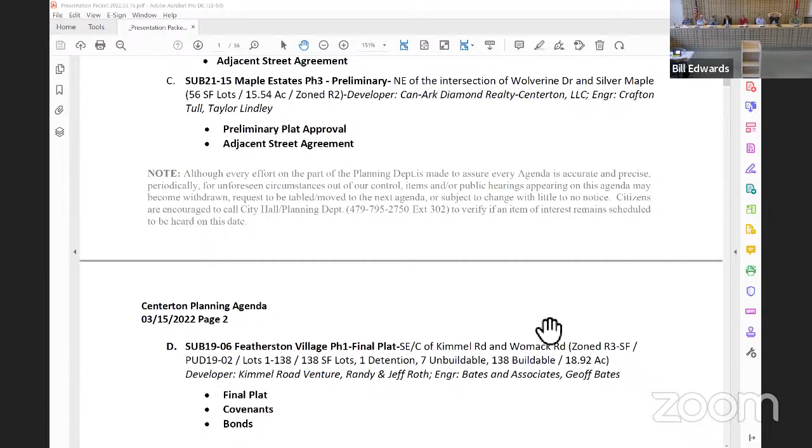Yeah, so the work they're doing on the food truck over here, still the work, that's Saturday. And the harps, take a peek at them, man. All kinds of stuff, they're working hard.

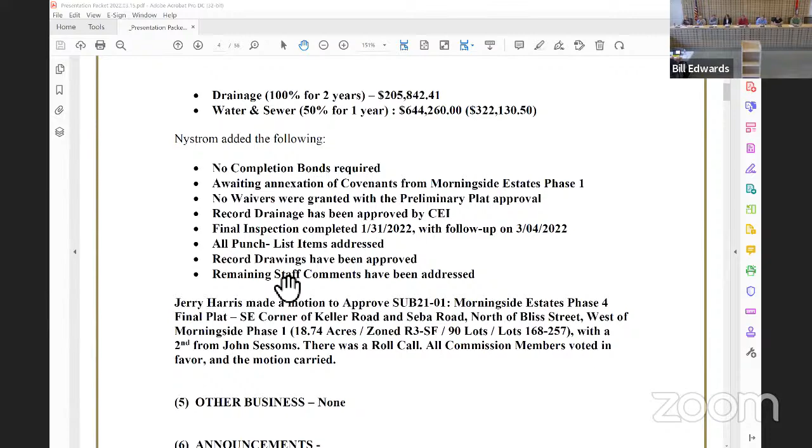All right, next on the agenda this evening is the ratification of the admin approvals. I looked through them, I didn't have any questions. Are there any questions or comments from any of the commissioners?

If there are not, then I would entertain a motion to approve the ratification for the admin approvals. Tony: I approve the ratification of the administrative approvals. Second. Motion and a second. Is anyone opposed?

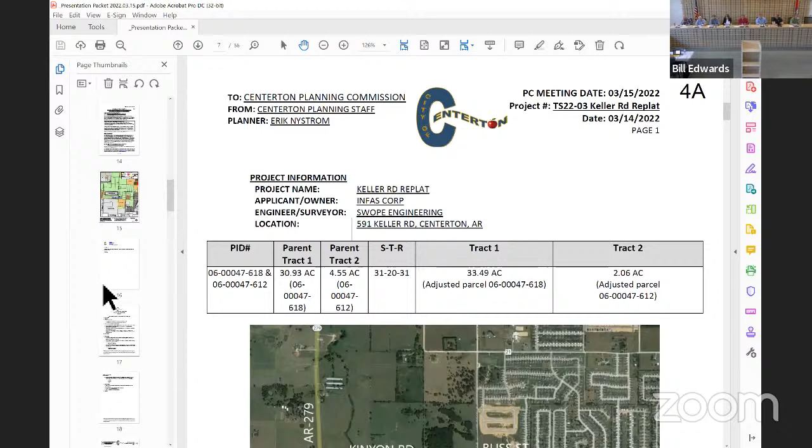All right, next on the agenda this evening is new business. First thing under new business was withdrawn, which was rezone 2203. Second thing on the agenda is development 2114, the Casa Castillo large scale development at 148 Seba. As a reminder, it's 19.5 acres and it's zoned C3.

To give us an overview, if you have any engineering questions or site questions, I'm here with the engineering survey. Yeah, in person, I'm Jeff. Yeah, I've talked to you a bajillion times. Yeah, the overview is pretty simple.

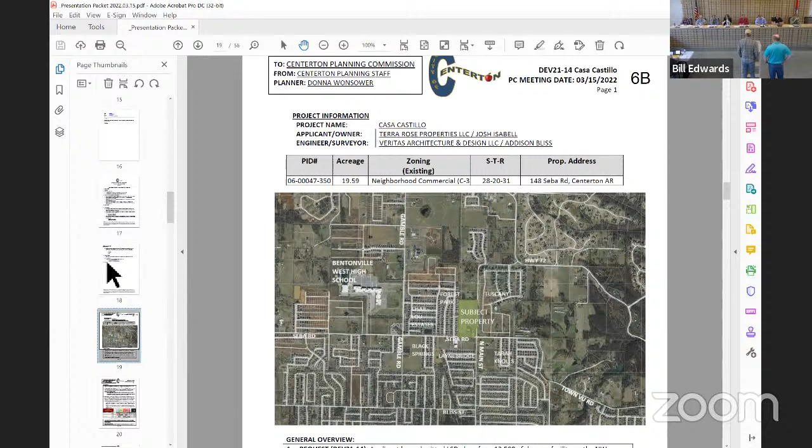Give us your name, please. Addison Bliss, the architect for this. The overview is pretty simple, it's a lot on an approved PUD. We're looking to do a daycare facility, in addition to the couple of adjacent roads and necessary structures, including parking, to service that first phase.

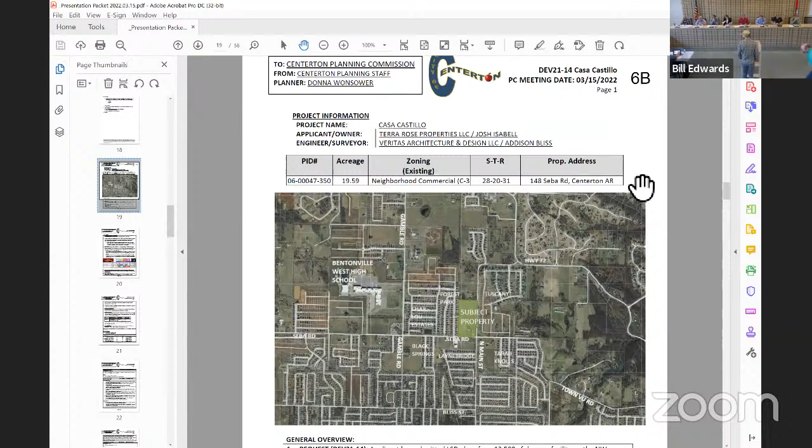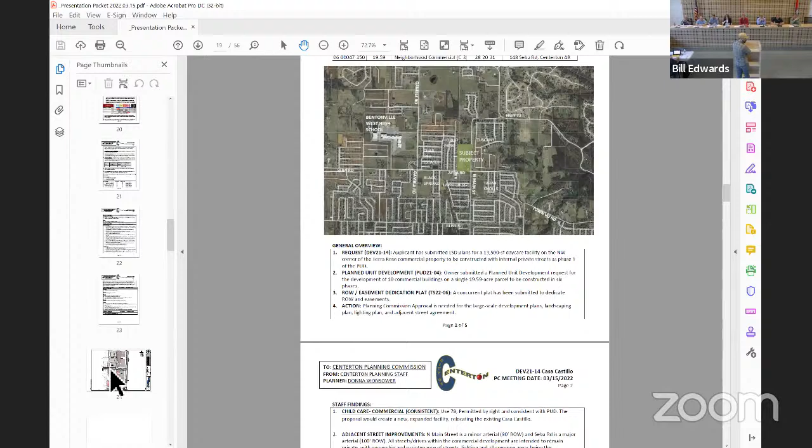Donna, you want to give us a staff overview? So this is phase one of the PUD that you all looked at previously. It is for a 13,500 square foot daycare in the northwest portion of the property, as well as the roads, utilities, and other infrastructure needed for the property.

We have received a concurrent right-of-way and easement dedication, which we are currently reviewing.

With that, there were trails which were discussed as part of the PUD. Staff has looked at having those installed with the buildings close to the road in order to avoid potentially those being damaged with later construction.

We have received a traffic study by Peters and Associates looking at the impact on the road, looking at the capacity and the levels of service. Levels of service are rated on an ABC scale. Anything lower than D would be unstable flow. D is approaching unstable flow.

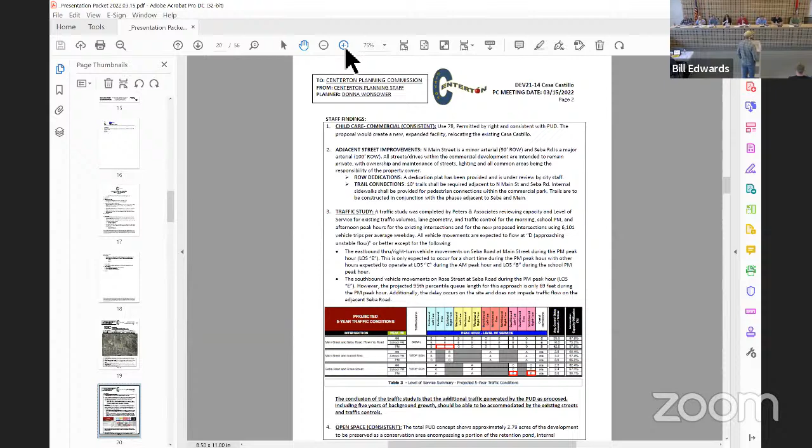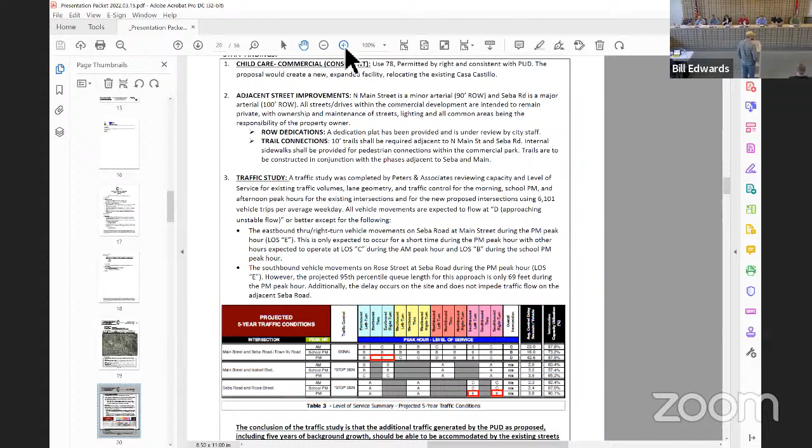Everything in the scale, which in your report, was D or better, except for 2, which is the eastbound through/right-turn lane on Seba at Main Street during the evening rush hour, and southbound also. The general conclusion of the report was that the existing roads can support the anticipated 5-year traffic from both the surroundings and from this development.

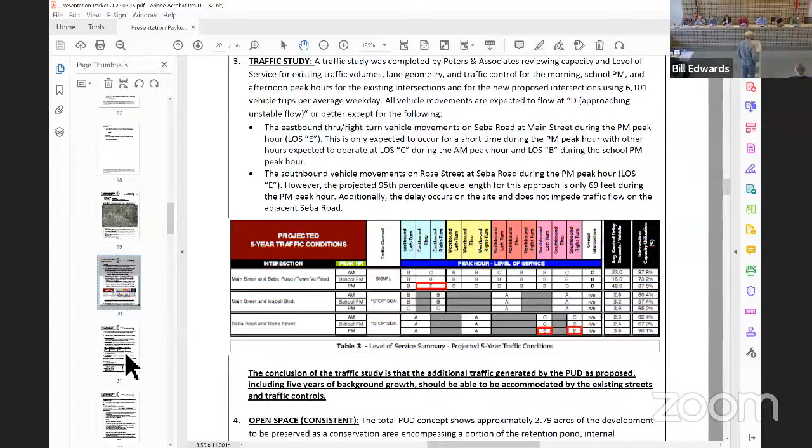There are some open space requirements from the PUD. There will be some requirements from this, which would be dealt with through dedication plat. There has been landscaping provided with this, with some trees along the western part, as well as some trees with parking areas.

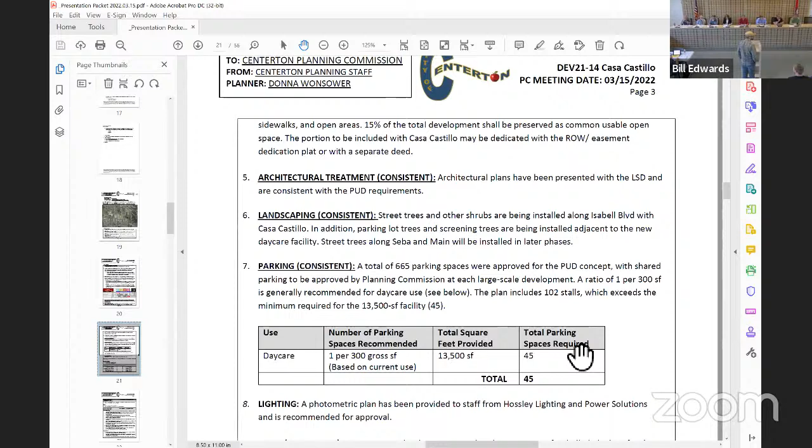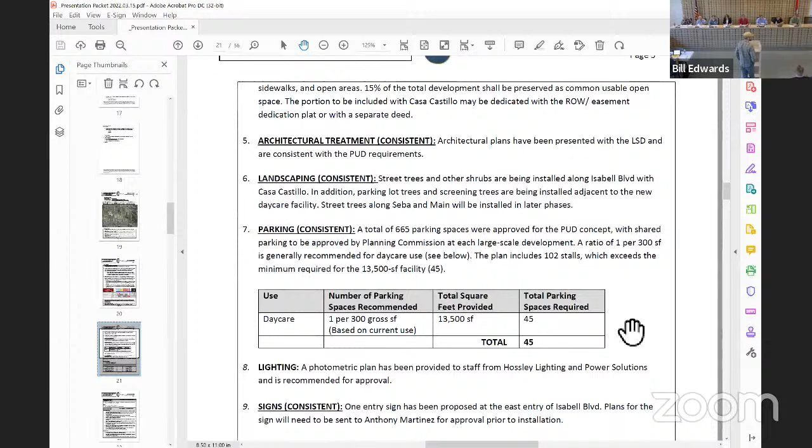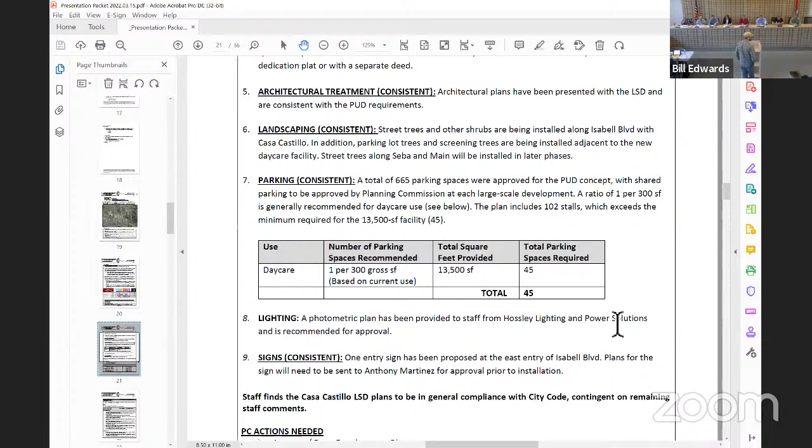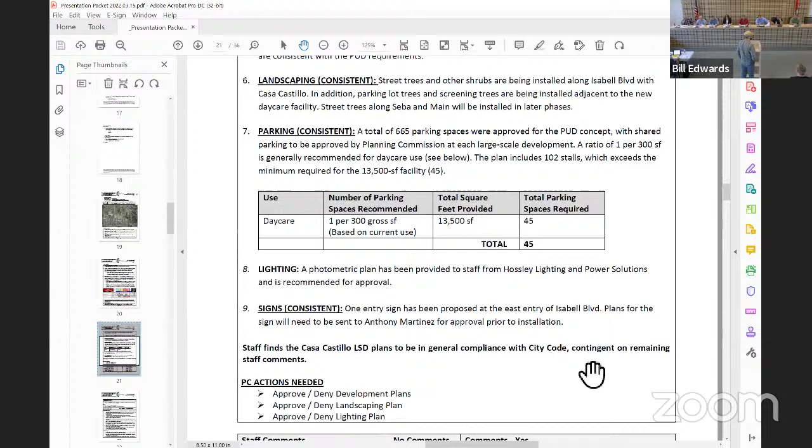So we did receive a plan for approval. There is one entry sign provided at Isabell. What we need planning commission approval for is the landscaping plan and the light. There are a couple of outstanding comments, including a minor adjustment to the adjacent street agreement, but generally everything is very minor, and we recommend approval.

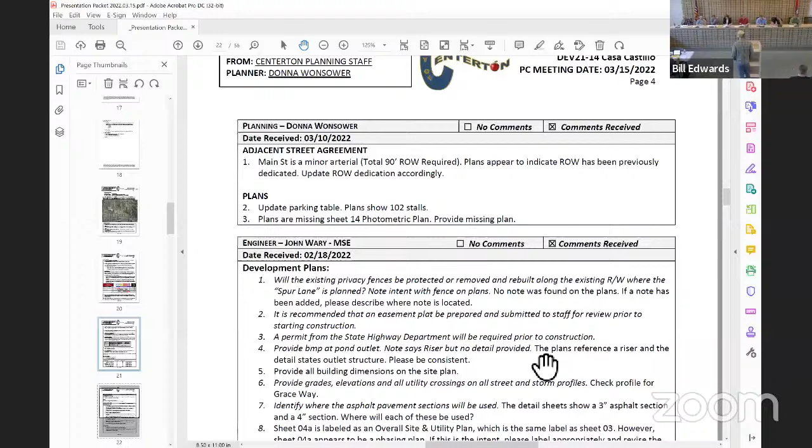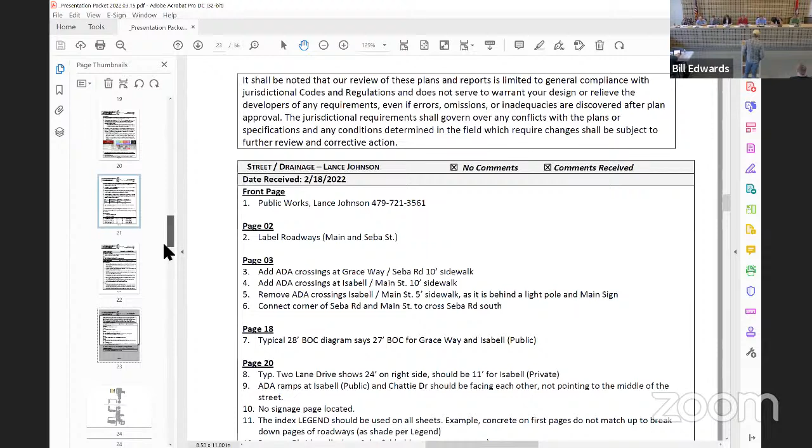And get the adjustments with the right of way and easements taken care of on that plat. Any questions or comments from any of the commissioners?

So we saw the overall PUD last time. Are there any changes to the site plan specifically for this one that would impact the PUD? Does it line up pretty well? In general, it lines up pretty well. There were some minor adjustments with how the landscaping and the trees function a little bit more, but overall it lines up pretty well with what you all saw.

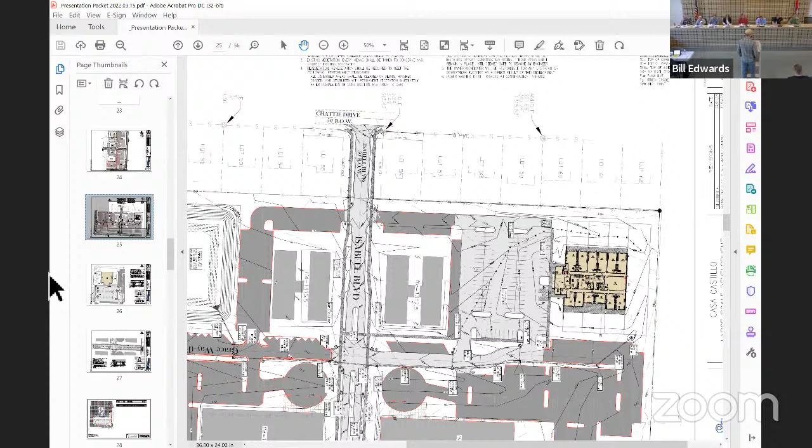Any changes to the Isabell Blvd? I know there was some talk last time about traffic going in and out of the neighborhood, doing something to slow that, I think we did the median, right? It is still aligning with the existing spur. Yeah, I see it, I see it. North is currently right on this plan, yes. That's great. If I turn it, my computer will completely freeze.

As I recall from the last meeting, we talked about traffic calming and a general consensus. I think it was that the speed bump situation we were talking about was not desirable, and that what we did with the trees, the landscaping, and the median was a pretty sufficient traffic calming strategy. I didn't see the bottleneck there. That kind of helps a lot too.

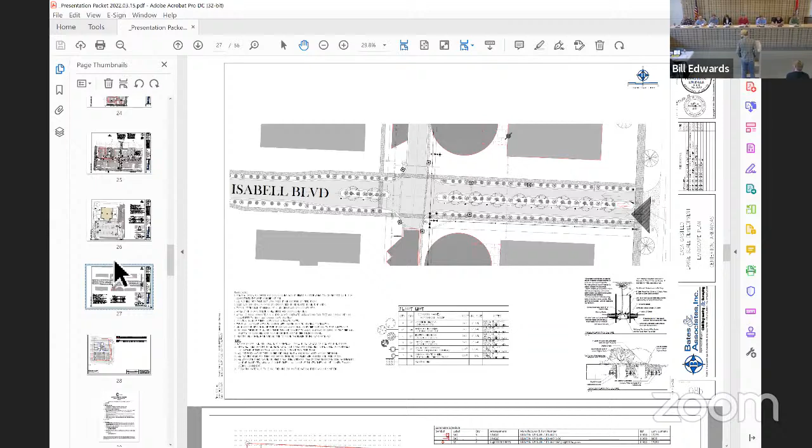Jeff, I have a question on the development plan. On the comments, they listed on item 7, the details show a 3-inch asphalt section, a 4-inch asphalt section. Does the section for Isabell meet that? I'm not seeing, I missed it. I'm not seeing the street. There should be some details, it's okay with the detail of the street.

Details with the street sections on there. I think what you're looking at is just for the parking lot. It could actually be some cross section. It may not have made it into our package yet. We didn't get that.

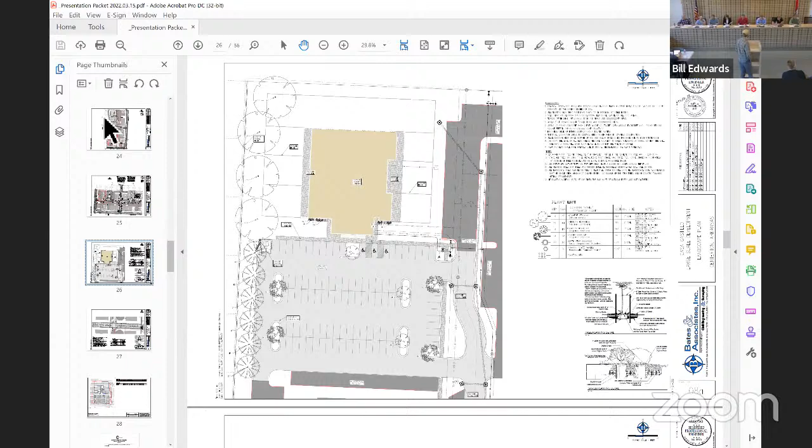Is staff okay with the level E? I don't, it references Rose Street, but I assume it's the Grace Way. The traffic study references Rose. Cedar Road and Rose Street. But Grace Way is, so I imagine.

Did that road name change? The South Street should have changed to Grace. Grace? That's not referenced in the traffic study. It says Rose Street. Rose would have been the previous name. That was approved.

Any concerns with the level of service E? Synopsis, there's a really great summary at the end of the traffic study. Oh, it occurs on site. Yes. I thought that the way they summarized it was in terms enough for us to kind of understand the impact in a better way than just looking.

What is the typical kickover point for road improvement? Rated on a level of service. I think anything D or E is acceptable. By all means correct me if I'm wrong, Tony, because I'm trying to remember from my transportation planning days. Level of service D is considered acceptable, like looking at federal highways and things like that. I think that's kind of odd, but that's what they consider acceptable. For E, I think they look at how long of a period of time that level E is going to be there. If it's going to be 4 hours a day, okay, that's not going to be acceptable.

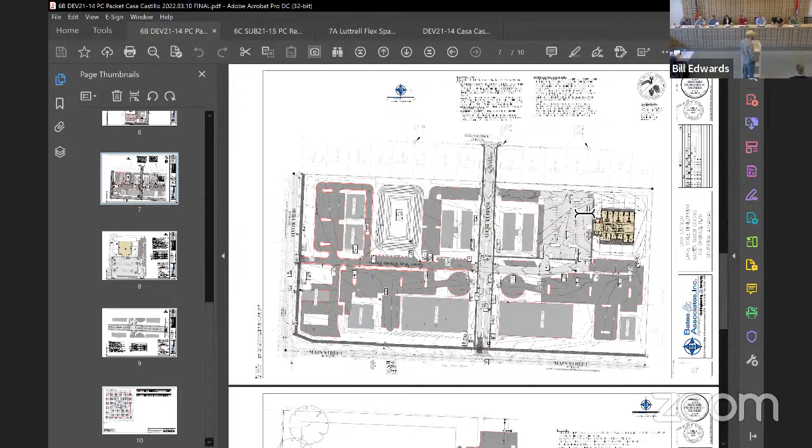Jeff, this might be a question for you. Are y'all curb and guttering, piping everything to the south side of Isabell and then just overland to the pond, and everything to the pond? I apologize, we don't have all of that.

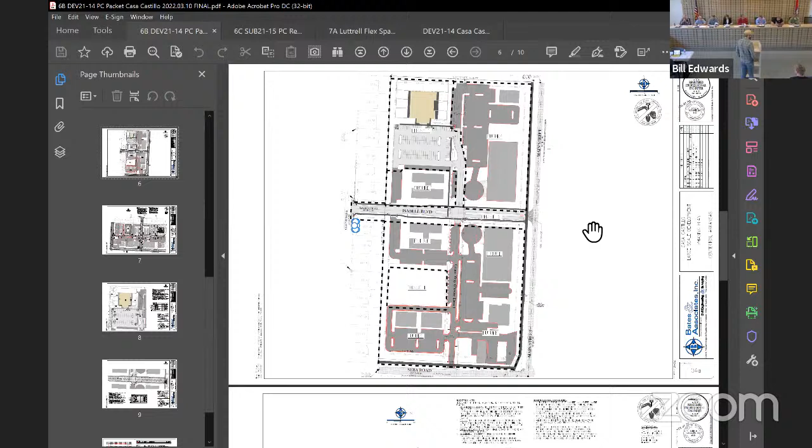No additional questions or comments, but I want to make a motion for the development plan for Casa Castillo. Again, understand the approval or denial would be on the development plan, the landscape plan, the lighting plan, and the adjacent street agreement.

Joey, I'll make a motion to approve development 2114 Casa Castillo, the large scale plans, landscaping, lighting, and the street agreement. Tony, I'll second. Motion and a second. Is anyone opposed?

Thanks, guys. Y'all poured some stuff down on the desk the last day or two. Yeah.

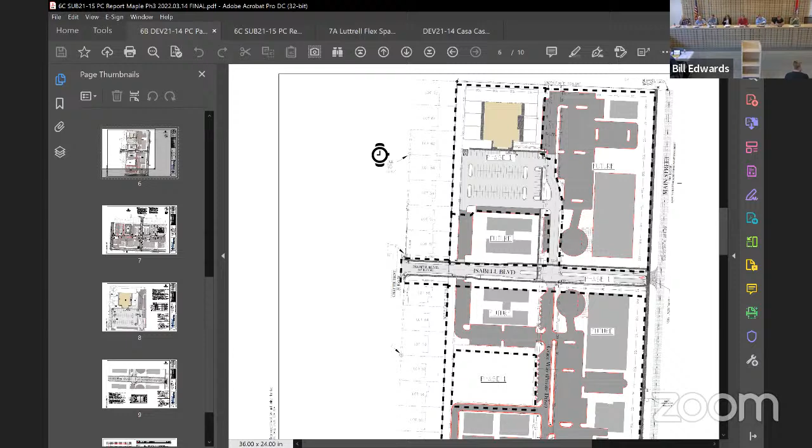All right, next on the agenda this evening is subdivision 2115 Maple Estates Phase 3. This is the preliminary. I know a couple of you guys didn't sign in, will you sign in for me before y'all take off. Back to subdivision 2115 Maple Estates Phase 3, this is a preliminary at the northeast intersection of Wolverine Drive and Silver Maple. 56 lots, 15.54 acres, zoned R2.

Your name and then give us an overview, please. Thank you for having me tonight. Taylor Lindley with Crafton Tull and Associates. This is the final phase of the Maple Estates subdivision just north of the high school.

Mainly 2 streets through there and improvements to Cutbirth and the last extension of Wolverine for that side. On the east side of Wolverine, water, sewer, pretty standard on this one. Sewer is accounted for by the lift station in Phase 1.

That will be available for any questions you may have. All right, thank you. This is you again as well. Sure.

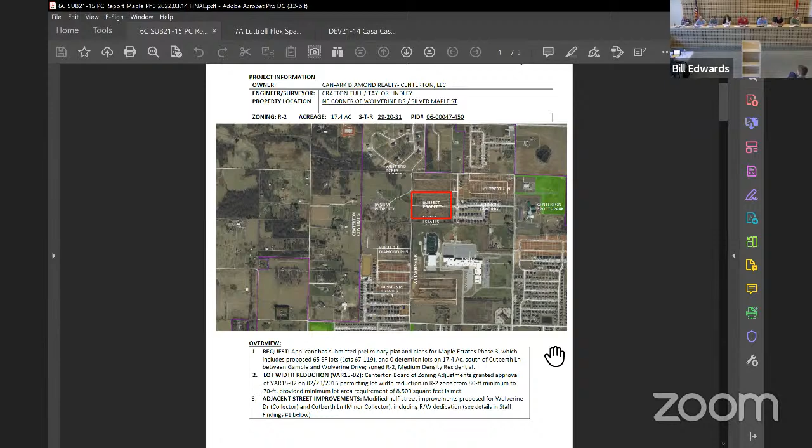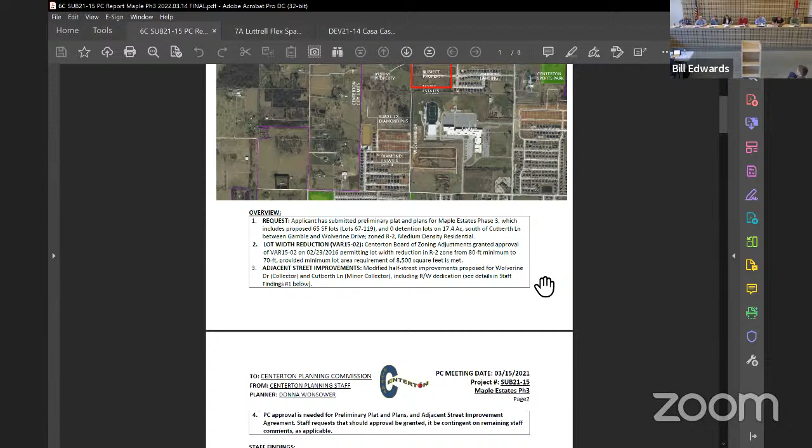There are modified half street requirements for Wolverine, and then for Cutberth with right of way dedication, more below. For Cutberth, there had been an addendum for phase 2 which was approved, shifting improvements to phase 3. With Cutberth, there will be 40 feet of section line, which with Williams Park North will give us the full 80 feet collector.

For Wolverine Drive, we are having drainage improvements, half street improvements, and a 2-foot gravel.

For right-of-way dedications, there were 30 feet of right-of-way dedicated west of the property with the tract split, and there are 40 feet of right-of-way to be dedicated with this property. We would request that the right-of-way be developed to ease access to that. So if possible, we would like to see that, but that is something that we can discuss.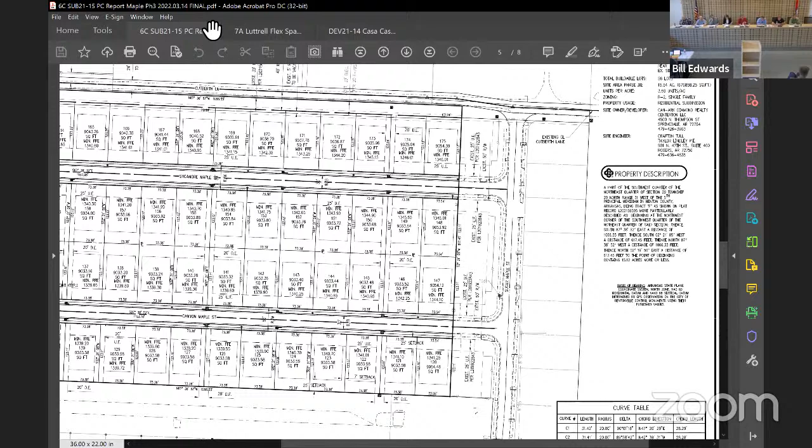Any comments or questions from any of the commissioners? From the comments I'm seeing, nothing requires to be bondable, just typical labeling. This is preliminary, so nothing there. We don't see anything substantial that would hold them up.

I had a hard time hearing you, what did you say you would like to see? Typically, right-of-way is dedicated with final plat. The property to the west is looking at developing, but right now they're really short of distance to get access to the south. And if we had the 30 feet of right-of-way, we could potentially get up through there. So if we got the right-of-way dedicated, it would enable that property to the west to actually come in. That would be a little bit of an unusual request, as right-of-way is typically platted.

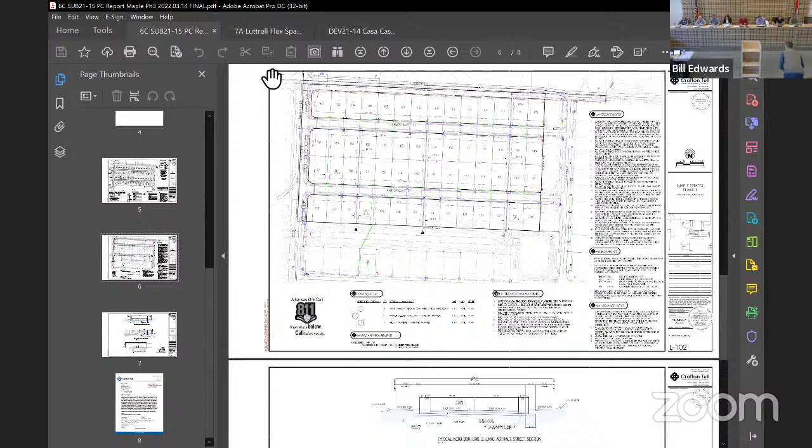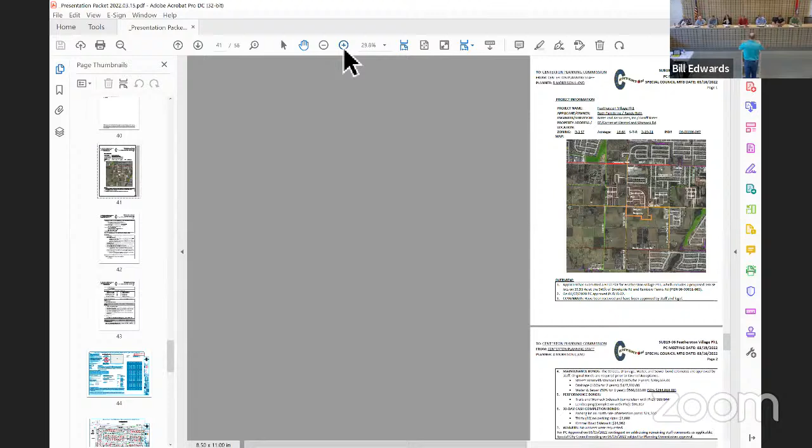All right, next on the agenda is subdivision 1906, Featherston Village Phase 1, final plat. This is the southeast corner of Kimmel and Womack. As a reminder, it's zoned R3, single family, PUD 1902, 138 lots, 1 through 138. They are single family. There's 1 detention, 7 unbuildable, 138 buildable, 18.64 acres.

Jeff, you want to give us an overview? Well, as you said, it's 138 lots on approximately 19 acres. I'll walk through it, it's ready to go with staff and everything, and we're here to answer any questions you might have. The owners are here as well.

Diane, this is you. Yes, this is phase 1 of Featherston Village. You guys did approve a PUD for this back in 2019 for the small homes. Actually, it was technically on January 7th of 2020 for the PUD 1902, to allow them up to 332. They call them micro homes, between 600 to 1,000 or so square feet.

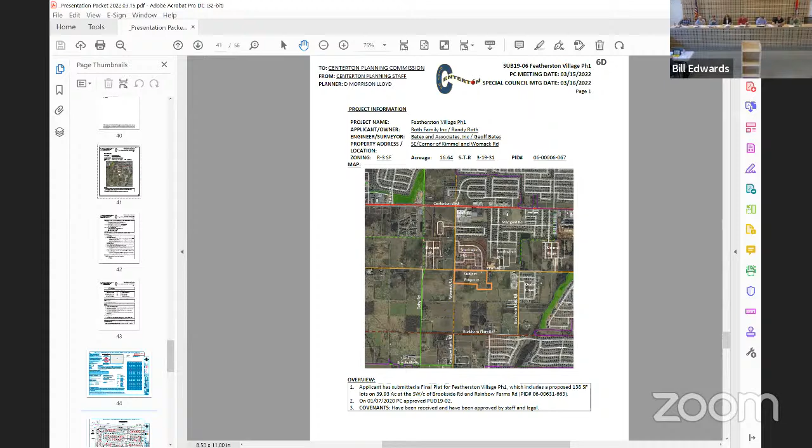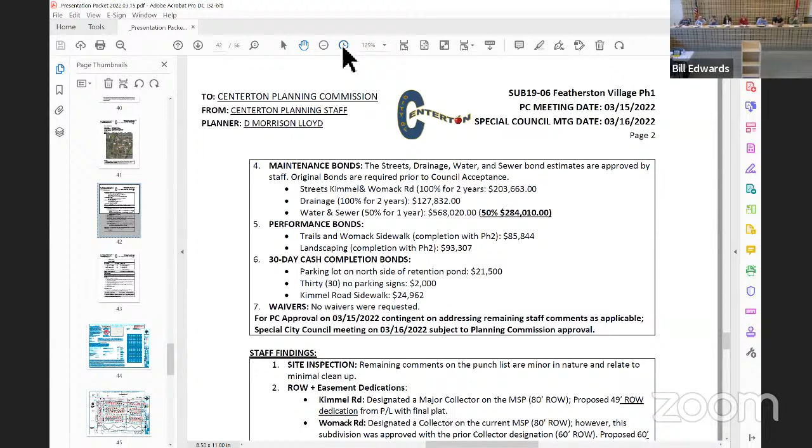And they are providing 25% green space for the property. The covenants have been received and approved by staff and legal. They will have several maintenance bonds that have been approved, and the hard copies are supposed to be delivered by FedEx tomorrow. For Kimmel and Womack Road, all of their interior streets are private.

For 100% for 2 years, that's $203,663. Drainage, 100% for 2 years also is $127,832. And water and sewer, 50% for the 1 year is $284,010. Again, those have all been approved by staff, and we have received PDFs of those that have been approved.

So we just are waiting for the final bonds, which should be here tomorrow. For performance bonds, it is for trails and Womack sidewalk. They're not doing the sidewalk all along Womack for phase 1 - that will be with phase 2. So they will be doing all the interior trails and sidewalk. This performance bond would travel on to phase 2 of the development, and that is $85,844. And landscaping - again, with the PUD, they did have required landscaping for this development, so that they don't install it and it gets destroyed as homes are being built.

And they're still continuing to work on phase 2. They do also have a completion bond of $93,307 from that one. And we also received today a 30-day cash completion bond for some items that were not completed out on the site.

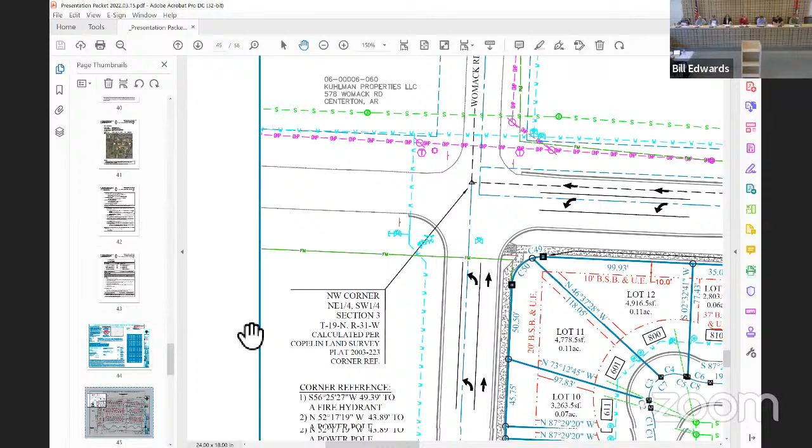There is a parking lot that is to be built on the north side of the retention pond - don't look at that and try to drive. That has not been constructed. They do have 30 days to construct that parking lot. Let me zoom in here so you guys can see it. It should go in here is where the parking will be, and it was not installed. So they do have 30 days to install that.

And there are 30 no parking signs that will need to be installed. That's $2,000, because again, with the PUD, they can only have parking on one side of the street. They cannot be allowed on both sides - too narrow to get fire apparatus and things like that through there. Also Kimmel Road sidewalk still needs to be completed, and they have a completion bond on that one. Again, has to be done within 30 days, for $24,962.

They did not request any waivers with the preliminary plat. And for y'all's approval today, contingent on addressing any remaining staff comments as applicable. They have requested a special city council meeting tomorrow, subject to you all's approval tonight. The site inspection, other than those items that they have requested and the bond estimate was approved for, everything else on site has been completed.

For right of way, they have designated Kimmel Road as a major collector. This came in after the new master street plan. So it is 80 feet, and they are going to be dedicating 49 feet from the property line because of where their property line falls in relation to the center line. So that's why they're doing more than the standard 40-foot dedication on Kimmel Road.

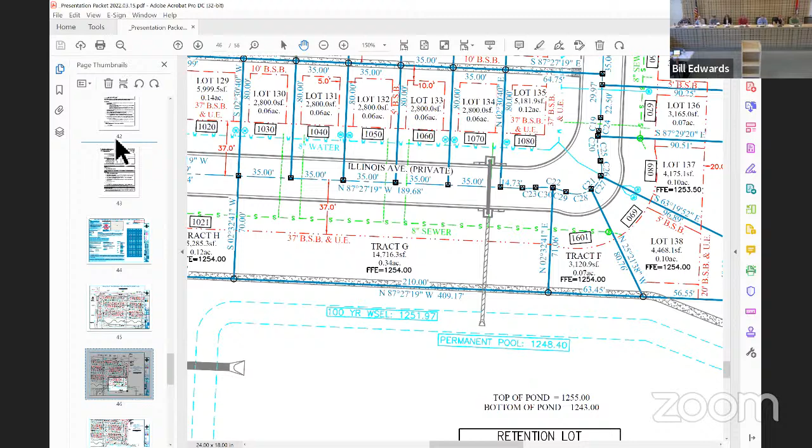For drainage, there are remaining comments on the record drawings pertaining to storm drainage inlets and the retention pond modeling. If you have any additional questions on that, you could definitely ask Alan - he's been reviewing this also. So the drainage report is pending approval until the corrected retention pond modeling is received. And for the record drawings, there are still several cleanup items pertaining to the drainage and labeling that need to be corrected before staff will approve the record drawings as complete. Staff does request a $5,000 completion bond for those record drawings, that way we make sure that they do get it back to us. And that's it in a nutshell.

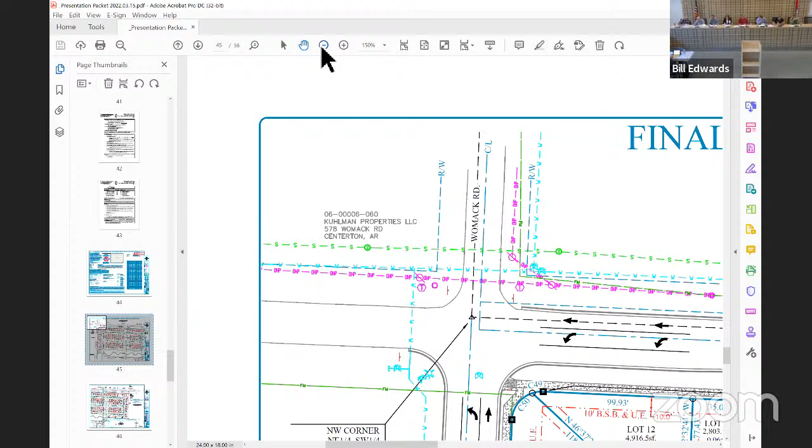And the remaining comments that were still out there pertain to the as-built or record drawings, and they are included in your packet.

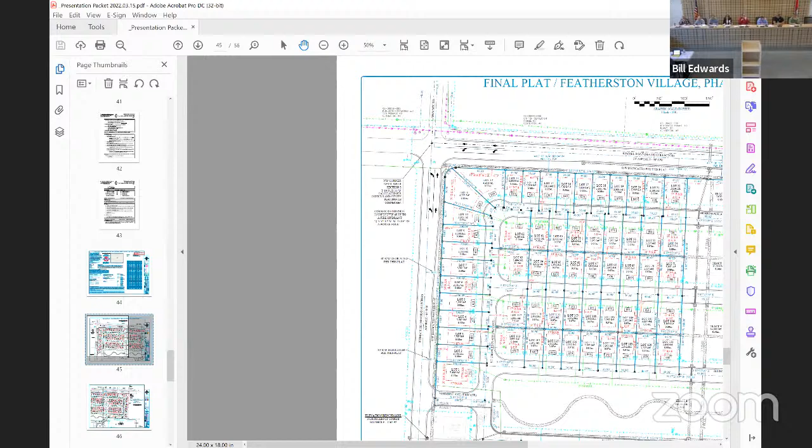Any comments or questions from any of the commissioners? I can't see the entirety of the notes because it's so small right now, but I would like to see it listed on the note sheet that the roads are private, to make it clear.

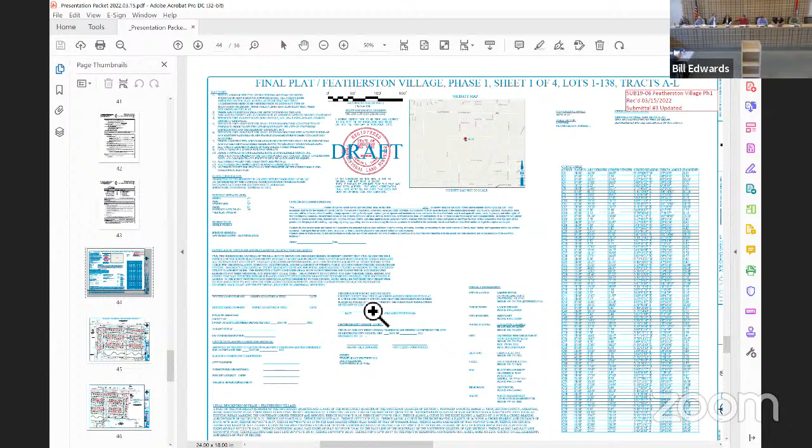It says it to me. Yeah, let me zoom in. I can't see it, was Sarah that... it does say it, it's small, but it does say it. There, it's blown up for you, Tony.

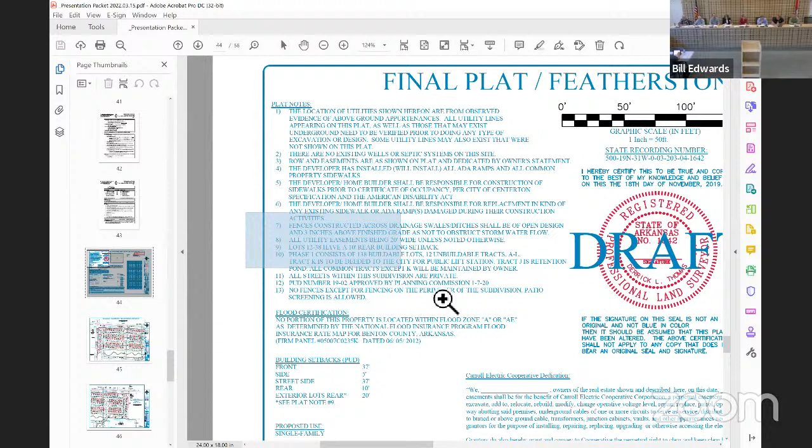All streets within the subdivision are private. There you go, I'll zoom in a little more to make it easy when you're a city official trying to figure out what streets you're going to maintain or not. Look at this note - yes, that was a note Lance was very adamant to be included, and he would really like it in big bold.

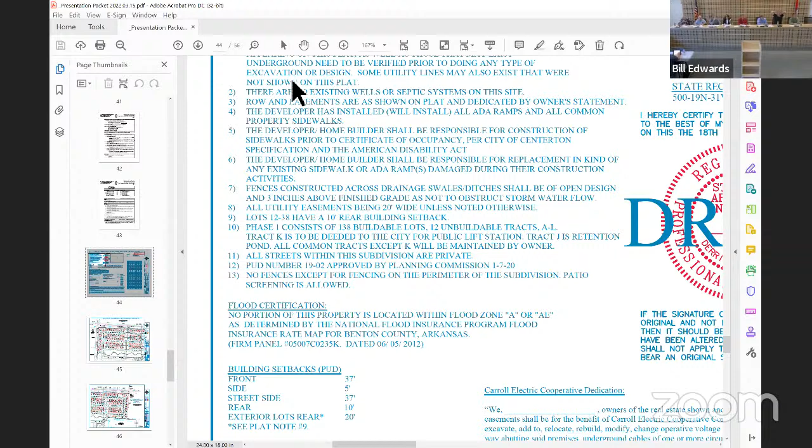Very good. So lots of bonds on this, and I got a couple questions on the bonds. Performance bonds, I guess, pushing stuff to phase 2 - were we expecting these to be completed with phase 1? We were, right? Yes. At least the ones that are in phase 1, obviously not the ones in phase 2.

Is there language in the bond to cover it in case phase 2 does not get going for any reason? There's - could be an issue.

Then the 30-day cash bonds, like the parking lot - I know we asked for that to meet just the sheer number of people here and try to have somewhere for them to park. What's the recourse on the cash bonds if they're not completed?

I'm sure, I don't know if Lance is here. Lance doesn't want to go in there and build a private parking lot. They're actually already being installed now. Okay, it would basically be the city would cash that check.

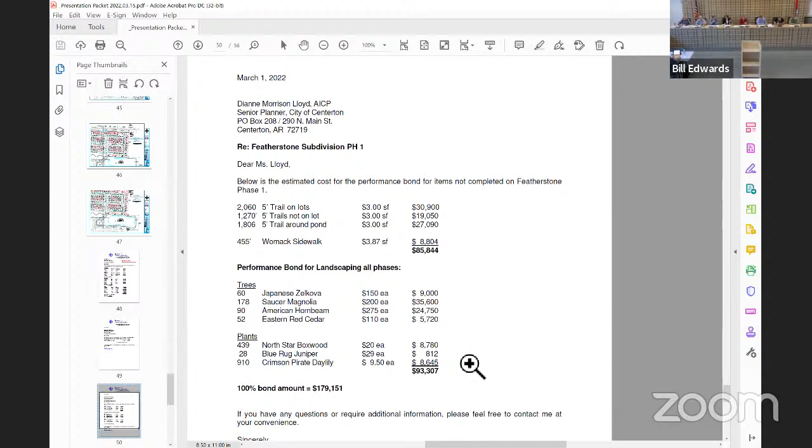Or just talking out loud, if for whatever reason they were not going to complete phase 2, and moved on, the new whoever comes in wouldn't have access to those bonds, I don't believe. Right, so those are made out to us - yeah, there's no protection for us.

Is that correct? Yeah, a second, Lorraine's got her hand raised. Let me grab her over here.

We're not trying to say anything bad about y'all or what you do, we just gotta look out for our infrastructure and stuff. If it matters, phase 2 is well under construction - they're getting meters, water and sewer all going in right now. All right, Lorraine, I think you're unmuted.

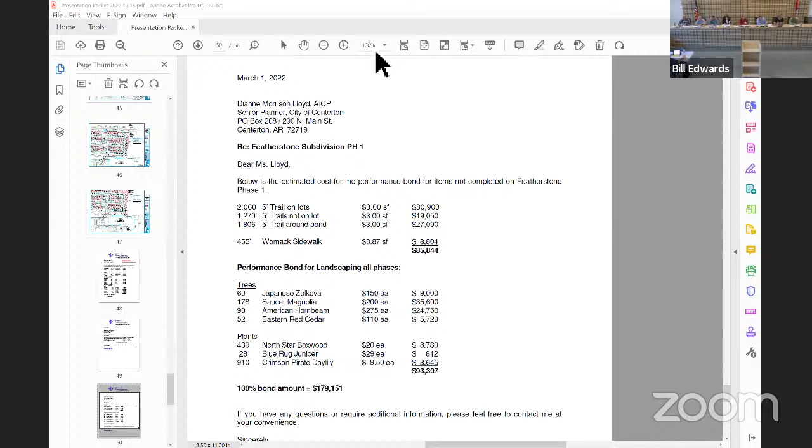Okay, on the bonds - the reason they are made out to the city, so if there is work that's not completed, the city can contract that work with some other developer or contractor to do that work.

The reason some were delayed to phase 2, like the landscaping, it would have been difficult to put that in and have them come in and build houses and tear up the landscaping and the trails. So we wanted to wait till that's built.

The performance bond on the 30-day, those were because the signs weren't in yet. The parking lot was one of those things where it was not shown on the construction plans, but it was shown on the PUD - the contractors did not have the PUD, and it just said parking, but it did not show anything being constructed. So we worked that out with them, and they will construct it, but they need some time to do that.

And then the Womack Road sidewalk, that also goes with building those homes along Womack Road, and then they'll put in that sidewalk. But the main thing is, these bonds, the bonding companies, the bonds are made out to the city, so the city can pull those bonds should the work not be done.

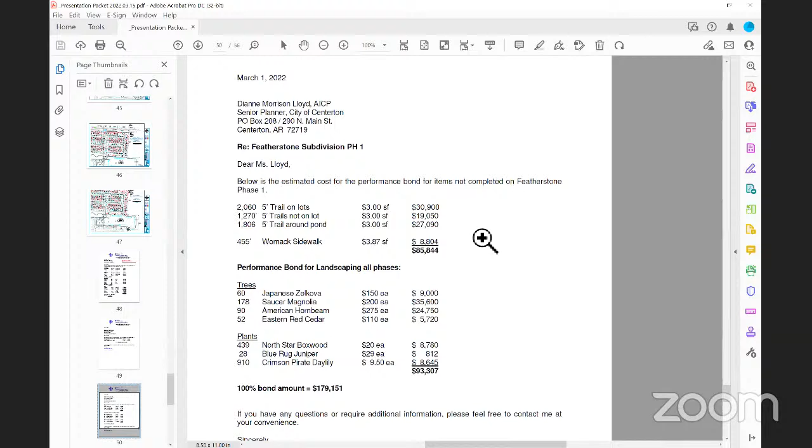Let's see, I imagine on the performance bond, landscaping. Okay, that was the performance bond, but this was... Dianne, how long was phase 1? How long was the landscaping? Because while they were building, I thought they were going to build out, and then do the landscaping. So that landscaping wouldn't be until everything's built out, but the trails would be once phase 2 is complete.

The landscaping one here says the same thing as the trails and the sidewalk, which is different than what you just said. Jeff Bates, or is Rob there? Yes, they're all here.

Yes, Lorraine. I was just wondering, I had understood that they would be working on this while they were constructing the buildings, and this is really just to guarantee it all gets done. As they build the house, they'll put the tree in front of the house and build the sidewalk. It's like the- yes, so yes, they'll just do it as they go.

I think there's an easy solution here, and it's to put a time frame on it as well. I was just looking at what was discussed on that time frame. Typically, I don't know about a time frame, you would do a percentage- once you've got 25% of the homes built, 50% of the homes built, because we don't know how fast the homes are going to sell. Obviously they're selling fast right now, but they were supposed to put these in regardless of the homes being sold.

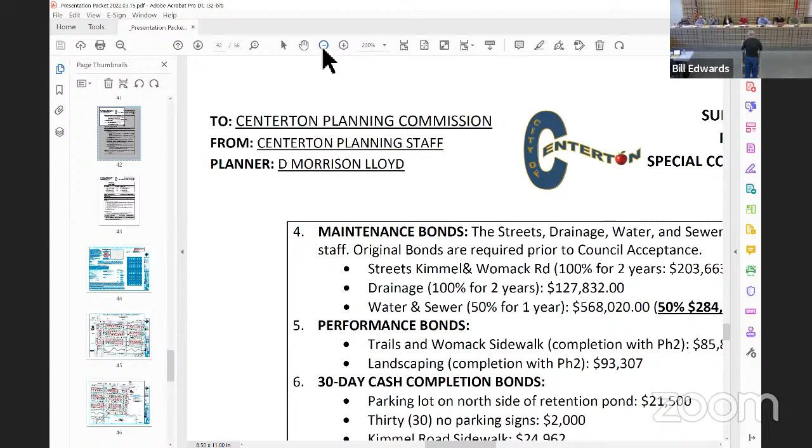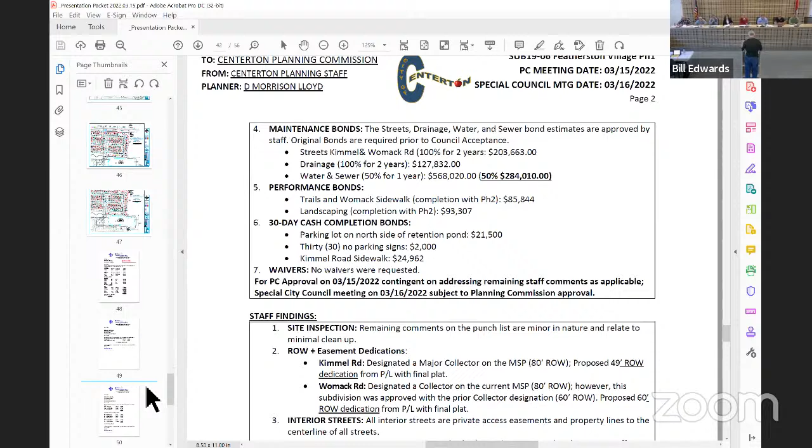Well, I know we're learning through this. Anytime, it's one thing if you're doing a commercial, you just finish it all and you're done. But on houses, where we are today, the next phase we do this, we'll make sure that the landscape part is better spelled out, how it's gonna be handled. At the time, I never thought about the problem that would create the expectations to have it all in place and flat, then building houses behind it and big trees.

I don't think we disagree with the trees, they're gonna get blown out of there if they put it in. And then the trails behind the houses washed out, with utilities, that part will go in, and just like a sidewalk in the front, that trail will go in at the time that the house is being built. And then it will be completed as it goes down.

But I think Joey made the point earlier, we're also trying to protect ourselves because if for whatever reason the 9 of us are not here, 4 guys are not here, and the staff isn't here in a year, then somebody may ask questions, and they're gonna have to go back and listen to this and try to decipher and understand the documentation. So that's the reason we're trying to do this. When we're working on the next 40, we're gonna have this better spelled out. And I know the PUD creates some uniqueness in itself as well.

3 years seems like a long time to me, but I would defer to you guys. I just want a triggering mechanism in there. So long as we've got something, I'm okay.

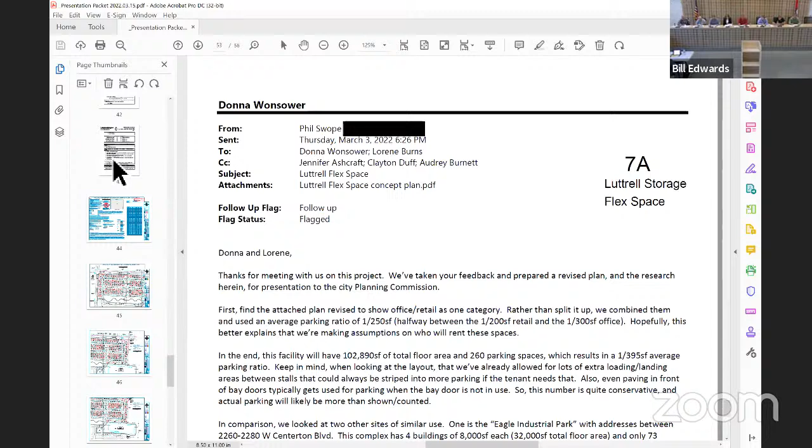All right, any additional questions or comments from any of the commissioners? If there are none, then I would entertain a motion for subdivision 1906, Featherston Village Phase 1, final plat, the covenants and the bonds as we discussed this evening.

John, I'll motion to approve subdivision 1906, Featherstone Village Phase 1, final plat, the applicable bonds with the amendment of a 3-year expiration on the performance. Joey, I'll second. We have a motion and a second. Is anyone opposed?

Including the $5,000 bond for the record drawings. Yes, it said all applicable bonds with the 3-year amendment.

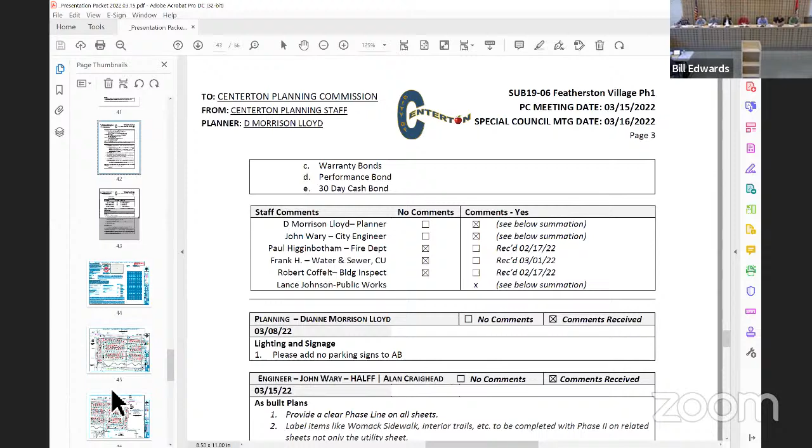Thank you guys, good luck. Thanks, Mr. Mayor, for getting Anthony on there for us. Speaking of trees.

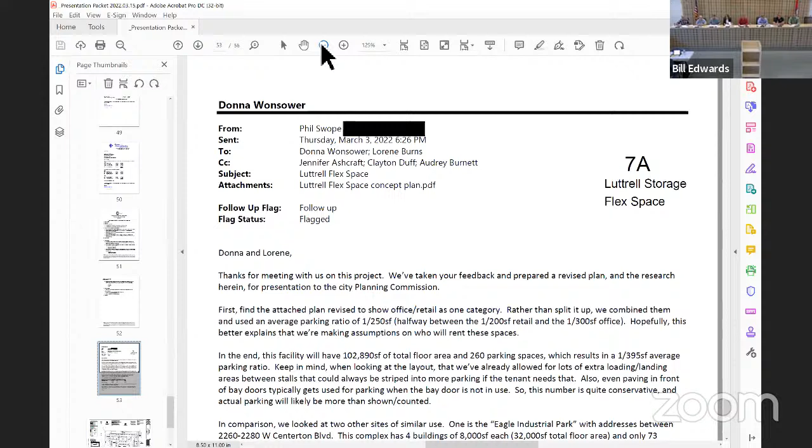All right, next on the agenda under other business is development 2102, the Luttrell storage parking requirements. This is at 780 Buckhorn Flats. It is zoned C2, 9.43 acres. How did I feel? I'm all right.

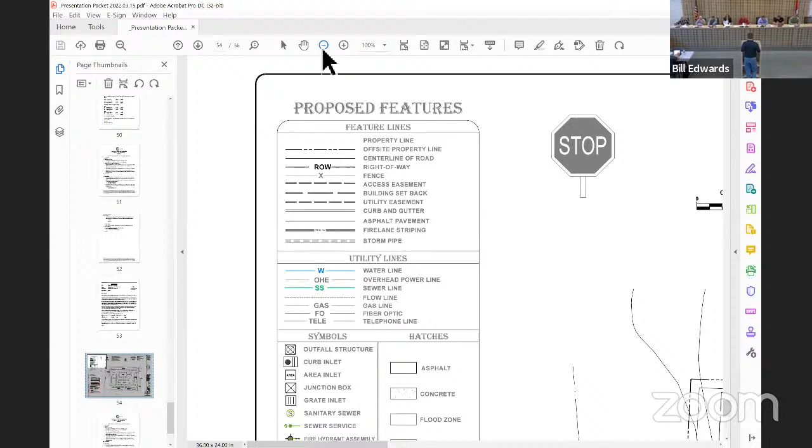You want to give us an overview? Sure, we're looking at this - it's on Buckhorn Flats, just south of Kimmel Road, west side. Some flex space here, so we've laid out buildings and parking, tried working with staff on just what the parking requirements would be.

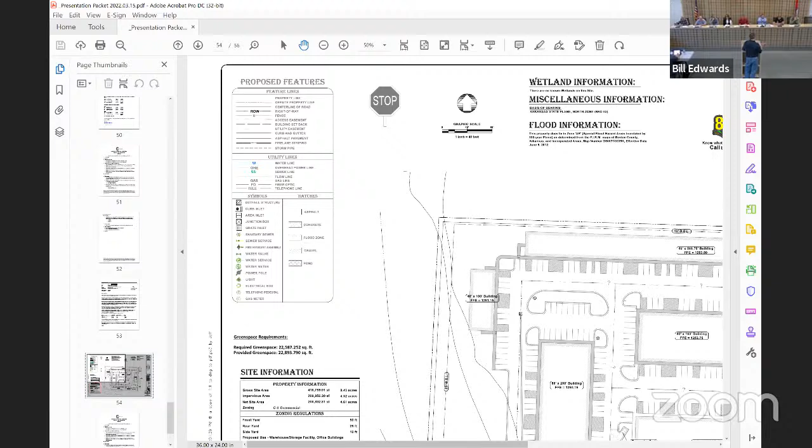There's not really a category in the parking requirements for what we're trying to do. We'll have a variety of tenants in this facility, but in general, what we're looking at is your typical plumber that might have a 200 square foot office and a place to park their vehicle and store some supplies, or a landscape contractor, a cabinet guy, a variety of different uses there.

So there's not a particular category we can apply to parking requirements. So what we've done, if you look down here in the red box, we've called for 75% of the space to be declared at the warehouse requirement for parking, and 25% as a mix of what your office and retail would be calculated at. So when you add that up, we have a requirement of 258 spaces.

But what we're hoping to do is get your nod that you're good with the way we're calculating parking here, since there's not really — we've been told we can ask for a variance, and we would if there was a baseline, but we don't have one. So we're looking for your nod that we're considering the space appropriate for 75% warehouse and 25% office and retail.

We'd also like to, we plan on bringing the large scale through for you to approve, but we'd also ask at that time that we be allowed to stripe all the parking stalls at the CO of each building.

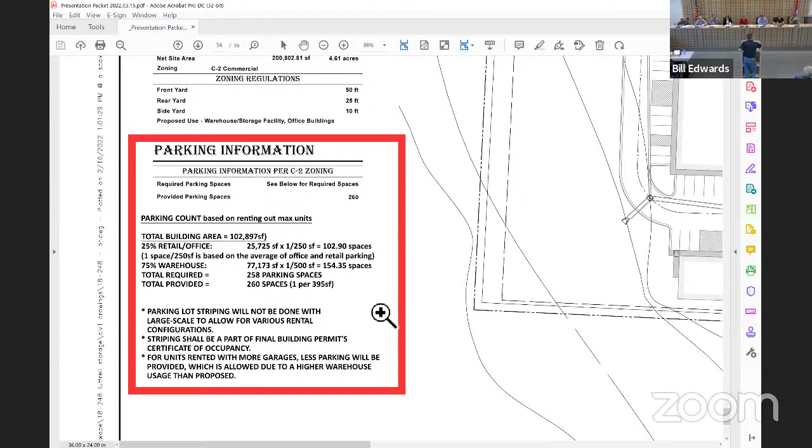Is that the loading zone? Well, what we show now, we may end up with just parking stalls all the way across every building, depending on the tenants that come in. But right now, if you look at a typical 40 by 100, those two existing ones in the southeast corner, we show 6 or 7 spaces in front of those. And we use that same model mostly everywhere else, 6 or 7 for every 100-foot run of building.

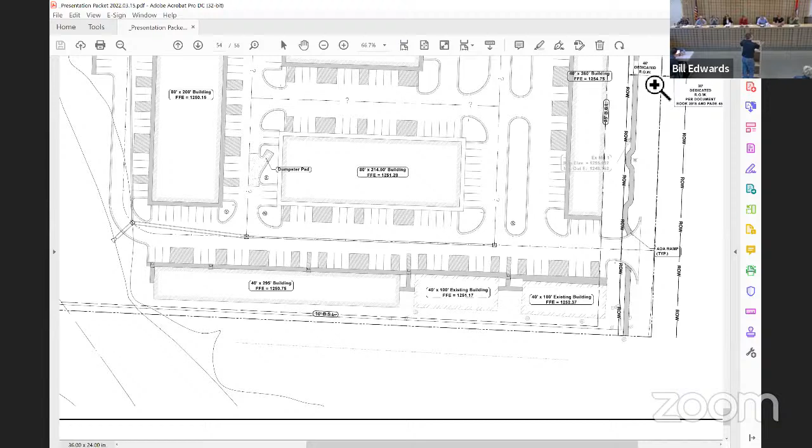We've allowed for some loading zones. There'll be some garage bay doors here. But even where the garage bay doors are, people will be parking in front of those bay doors. So it's a unique situation. It's going to require some flexibility in the way the parking requirements are interpreted.

But what we did is we looked at a couple other facilities. There's one over by the Spare Box Storage, I think the Bernetti's have there right on 72. Calculated their parking, and we've got well more per square foot than what they show. We looked at another one on Highway 102, called Eagle Crest or Eagle Industrial Park, and we've got more than what they've shown as well. But this facility is at least twice as big as either of those, so you'll have some economy of scale. I think this amount of parking is going to be more than enough. We feel very comfortable.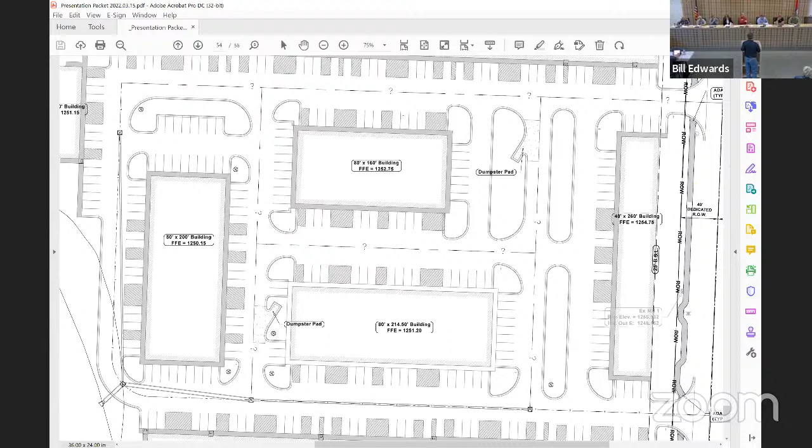Where'd you come up with the 75-25? Yeah, that's really the discussion. I don't know, we ran that number and tried to see how many parking stalls that came up with, and based it on what other developments like this have. This comes up with even more than any of those have ever.

Going over to the Bernetti's there on 72 -- talking about the offices in front of the storage units? No, behind there, the unit beside it. Okay, yeah, beside where the school is, there's some warehouse stuff, right? I can add some input on that -- Fresh Craft Electrical, so I'm involved in that as well.

I did a little bit of market research and tried to pre-lease just to get an interest. When we leased the buildings that are existing, we had zero interest from a retail or office type person. It was absolutely your electrician who wants to use it as his shop. We had a cabinet group interested. We have some existing tenants that want to expand to 4,000, 6,000 feet. So I don't think we're going to be renting them out at 1,000 increments and have a lot of retailers out there off of 780 next to the concrete plant. But we did want to allow for that, in the event some of those folks manufactured something that they would create a retail for themselves, and we didn't want to restrict them.

Well, that's my question -- where is this located? On Buckhorn Flats, if you go south from Kimmel, it's just past the concrete batch plant. Concrete plant? Okay, just south of it.

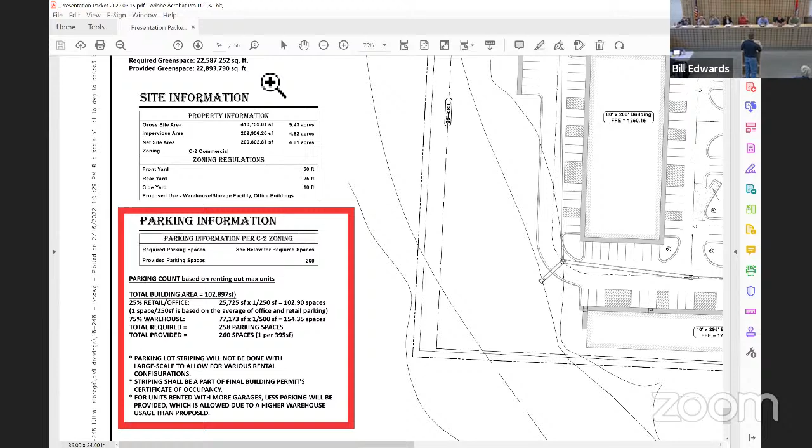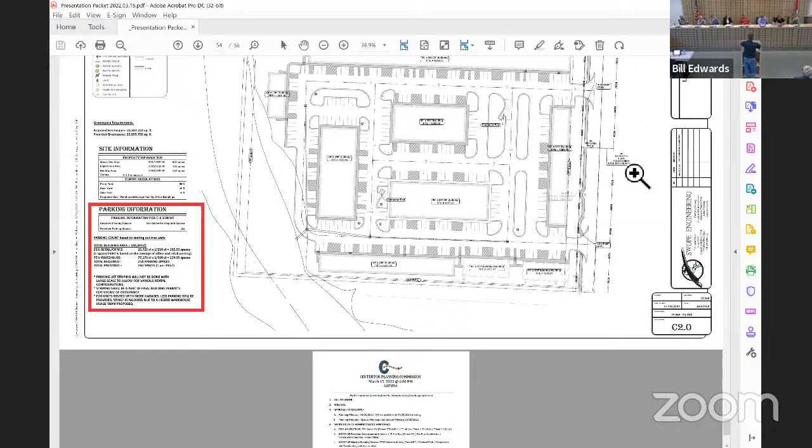So let me throw some out -- let's go back to the overview then. Just look at it overall. If I look at it that way, it's going to be more, I'll call it heavier commercial, not quite industrial. It doesn't seem very friendly for that. The one you referenced over on 72, it's wide open, right -- you pull in there and you've got wide open space. Here, if I'm trying to navigate a larger truck, a mid-sized truck, a trailer and everything else, it becomes difficult in my mind to navigate some of that.

So in that case, I wonder if there's a way to have, I'll call it flexible parking for lack of a better word. I don't know what that really means, but maybe at the top of the screen, instead of being striped for parking, should that be more flex? Or maybe even in the middle, and then we take that away from a parking requirement? I'm just talking out loud. Are you saying instead of each individual building having a set up area?

Maybe there are areas, I don't know, I'm just throwing ideas out, rather than dictate an exact amount of parking. I get we have to give some guidance, but I like some of the parking around the buildings. Maybe in the navigable areas where it would be difficult - if somebody wants to bring a 53-foot truck in there, they're gonna have problems right now, just looking at the big picture. Is there a flex space, a hard surface, that could be striped if you suddenly get an office needing 100 parking spots? Versus today there's more commercial potential. I'm just throwing it out there as a potential in the future instead of a requirement.

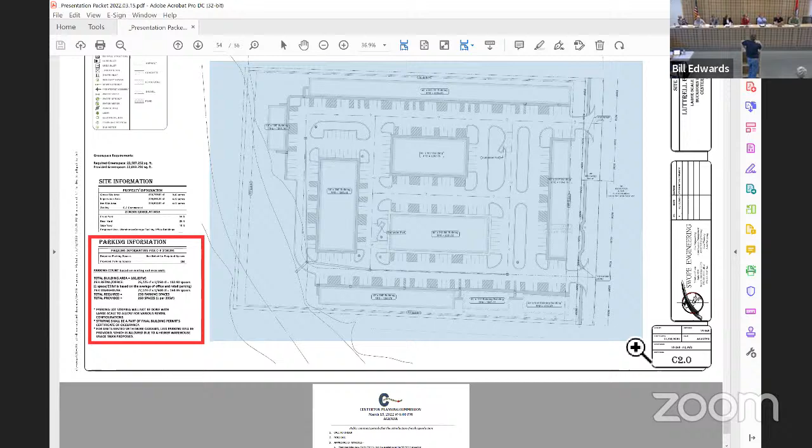Yeah, and I guess in general, I think what we're hoping here is that - I know y'all are enforcing the code, but we're hoping market dictates what's needed here. People aren't gonna - if we do this in phases, I like the idea of phases, but if somebody comes and sees the first phase built and says there ain't parking for anything, I'm not gonna go there. We're hoping that pressure is what really dictates what parking is gonna be needed. I would love to still do it all as one large scale, but phase it into smaller pieces, so if they see this isn't working or they can't rent to who they want, then we say we gotta regroup.

Just off the cuff, speaking for myself, this looks like a lot of parking. Yeah, well, and we've cut it - it looks like a lot more than Bill would expect.

We had to cut back the north middle building because we tried to make sure we could meet the green space requirements. We also feel like there's a lot of green space. The interior 8% green space was a challenge to make work as well.

I asked how you got the 75% calculation. We created all these extra green islands just to meet that, which normally you would see in a commercial park, not more in an industrial type deal.

I will say you're very adjacent to single family too. I think it's gonna be important on your frontage and maybe that south side to have enough room to plant trees, screening and stuff like that.

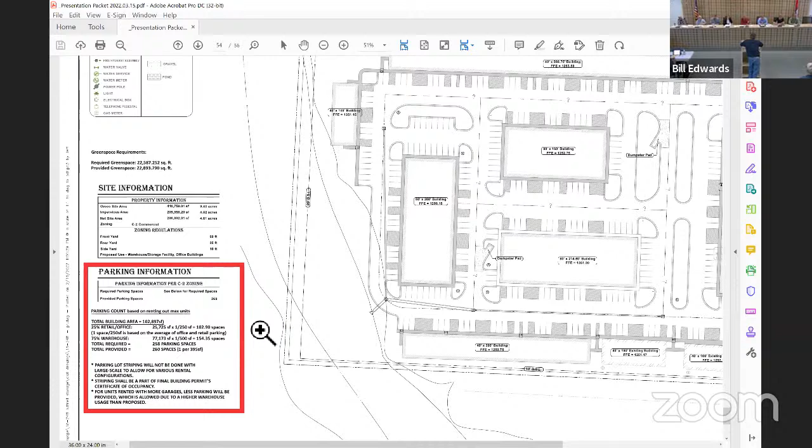Oh, here we go. But I do think, from my perspective, the ratio is a good one to use. In an environment like this, we need a little bit of flexibility and also rely on you guys to come back as you're doing the phasing to give us what we actually have. We also need to understand if that building goes away in 5 years, so it's not just a short-term tenant, it's also midterm and long-term. That's the reason we have some of these ratios. Overall I think it's good. I'm certainly open to any other commissioners that have comments or questions about it.

What's your temperature on us striping at the C of O? I guess what I'm concerned about is we get to the end of a build out of a phase and then there's a walkthrough and they're like, hey, did you build the parking that you promised? Well, we wouldn't in that case because it's going to kind of depend on that tenant.

You could stripe them by phase, right? Yeah, yeah, correct. Okay. So, I mean, we'll pre-lease it.

Okay, so maybe that, it sounds like a lot. Well, have you used the building before? Yeah, so it sounds like they changed though. What are y'all gonna do then? I mean, I think they're just gonna have to have something that happens on the owner side, that they lease to someone similar or for similar or less parking requirements than what.

Turn people away. I mean, our ideal tenant, just to be honest with you, for managing the property today, is not an office and retail tenant. It's the industrial guy that's either building, constructing, et cetera, and they are willing to sign longer term leases with rent concessions and different things. That's more the model we would simply manage versus turning fast and renting them every year. That's not the model here, like multifamily housing or anything like that. That's not what we would be in.

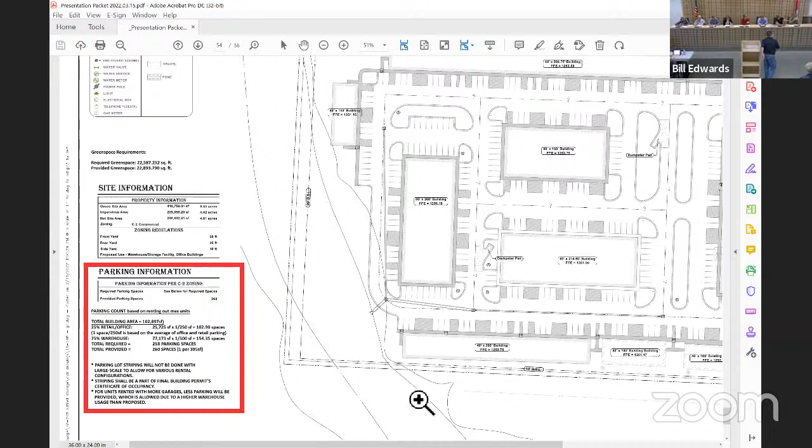So on the north and south run of that east-west parking, is there a feasible location to break that up with a couple islands or something? Tell me again what you're talking about. So the bottom run and the top run, I'm just thinking, as you go by and you look, that's just gonna be one expanse of asphalt. I didn't know if there's logical places maybe between the two, all those buildings down there, but then the top doesn't have any.

I think we could do some islands in there, just a couple to break it up. And then whatever we lose in parking, we may pick up elsewhere. You have zero, or can we- you've got the stripe space that could. It could just be that anyway.

I don't think it's an issue for anything with the two middle buildings, right? Or if that western building faces inside. Right. But that, again, that's a matter.

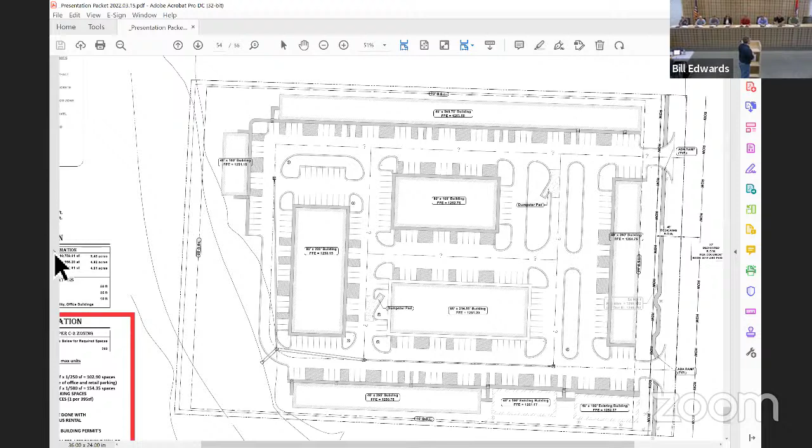Are we right on the dot with the 8% interior? We are. We talked about adding others too, so we'll probably have to use up the bigger parking spaces there so we can widen that. We'll just add, should have 28.

Could you flare that out, if your pond doesn't take up the whole area, to make that turn wider and then taper it back in up by the plant? I think this is drawn to scale. Yeah, within the floodplain you could kind of bump that out a little bit. We'll lose one or two spaces here and here, and that way this radius can work.

Could you adjust the western curb to get that? On the other side of the road? Yeah, both, flare it out and then come back, like a little bubble, like a little knuckle on a cul-de-sac. The problem is this is floodplain, so I can't go very far. I thought that was floodplain.

I think we can still pull that radius way back, so we can pull all this back, which would be good for that too. Whatever we lose there, we can add back. Yeah, if we smooth it out, it's not as tight of a radius, it'd be better for y'all and for fire. Well, your feedback's very helpful, thank you. Thank you, good luck.